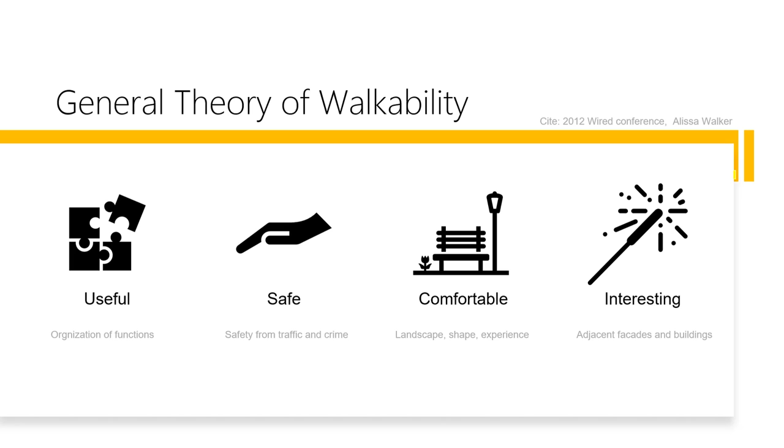In order to explain the research methodology, we would like to give you some background information about our research context and case study. The city of Pécs, once the cultural capital of Europe in 2010, experienced a wide range of improvements, which enhanced the pedestrian experience in harmony with the rich history of Pécs. Kórháztér was part of these enhancements. It included the development of pedestrian sidewalks and pathways, historical vegetation protection, etc.

Kórháztér intersection was chosen as the area of field work for the following reasons. First, it is one of the busiest public transportation junctions in the city, where more than 13 bus lines are interlocking at the bus stop of Kórháztér.

Second, Kórháztér is connecting four streets: Rákóczi Street, which is a ring road enclosing the historical downtown, Hungaria Street, leading to the West Subcenter, Alkotmány to some faculties and residential zones, and Ferencesek, which has rich pedestrian, historical, and commercial value. From Kórháztér, it is possible to reach any faculty by bus or retail clusters within the city, and the city center with most restaurants, cafes, and bars.

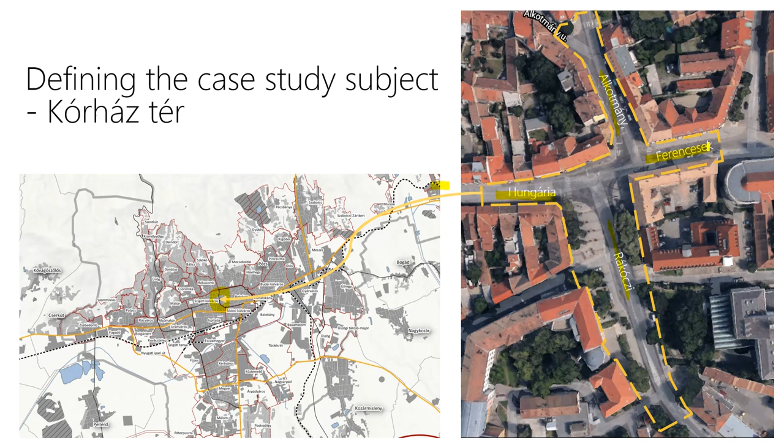The research studies both the junction and the division of the connected streets to assure that analysis and results can be accurate and carried in a continuous method. Based on the chosen field case study, we developed our research methodology. The research consists of field investigation and improvement study. The field investigation aims to measure the impact of existing greenery on pedestrian walkability.

Therefore, we use both qualitative definition and quantitative measures to firstly assess greenery area in accordance with the pedestrian experience in both vertical and horizontal dimensions. The vertical assessment is based on street elevations perceived at the human eye level, and the horizontal assessment is based on floor plan perspective.

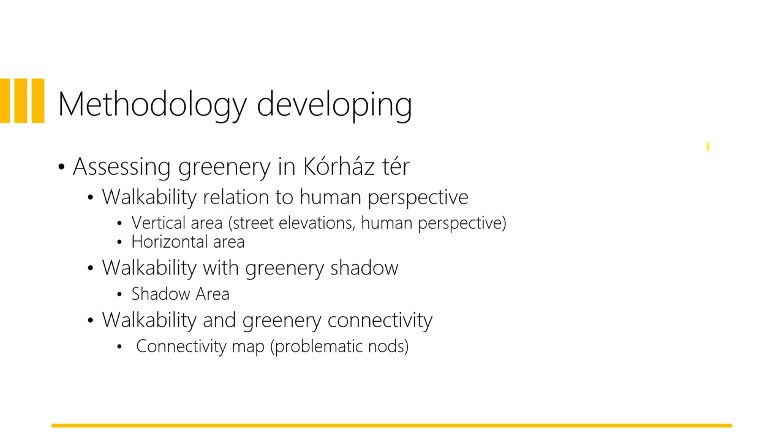Subsequently, it aims to assess the sidewalk connectivity at Kórháztér intersection, taking into account the position and size of greenery. With the result of investigation, improvement study comes along to identify the potential of walkability in terms of greenery enhancement. In order to assess greenery horizontally, the method applied deliberately focuses on spatial impact in relation to humans.

Existing vegetation was classified according to its visual impact from an eye-level perspective into the following 5 categories according to volume and height, which are trees, bushes, pots, wall cover greenery, and ground cover greenery. While walking through the area and photo documentation, it was found that acer, ash, and platanus are the most dominant species found in Kórháztér. In addition, 2 aged pine trees exist in the middle of a sidewalk as part of heritage protection. After identifying each type of vegetation, the green space coverage is extracted from aerial photographs.

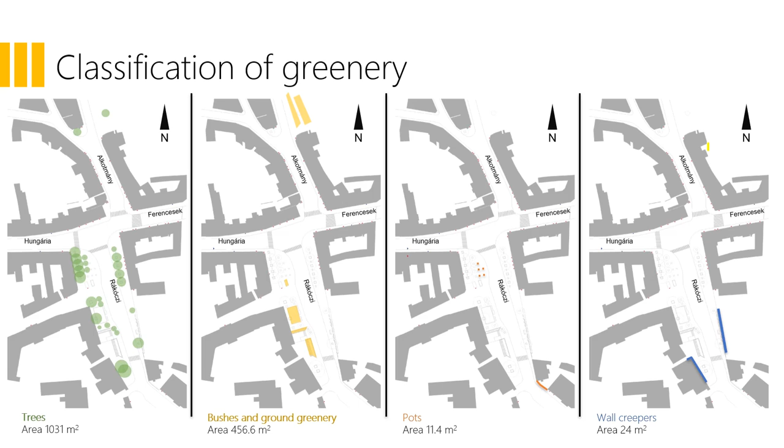We mapped the greenery by plotting their position and type. From the maps, each type of greenery was quantified, and the area was calculated from a floor plan perspective. Trees were located in different locations of the sidewalk, covering an area of more than 1,000 square meters of the sidewalk. Bushes and ground cover greenery cover over 400 square meters and are mostly located behind the stationary waiting zone, while pots and wall cover greenery cover approximately an area of 36 square meters from the top view.

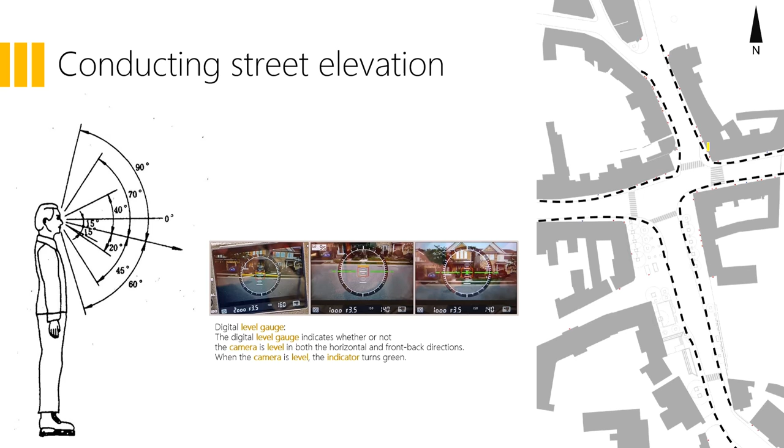The other assessment was based on the vertical measurement of greenery. The street elevations at human eye level are documented with photographs. To record the right vision of the human eye and meantime the elevation view, a digital level gauge was applied. The process of leveling is demonstrated in the photo in the middle. We used a Sony RX100 third generation camera to take a series of photos along a path aligned along the building facades. With this method, we define the perception of pedestrians at Kórház tér in terms of an elevation approach.

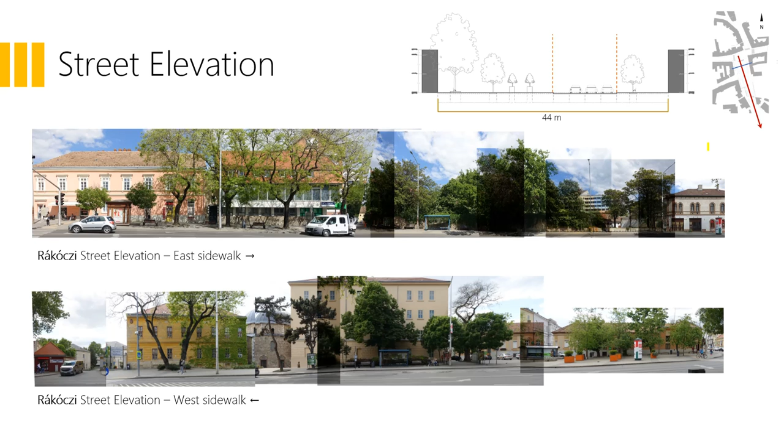Then we merge the photos in Adobe Photoshop with the help of the stack script, tweaking it manually when it's not applicable. Here we can see 2 elevations on Rákóczi Street with the section at the widest part. Here you can see a segment of Alkotmány Street elevation, which is to the north of Kórház tér. We can see that there is a sudden decrease of green coverage compared to Rákóczi Street. From the section, we can also notice that there is no buffer zone between car lanes and pedestrian sidewalk due to the narrow street section compared to Rákóczi Street, where it was 44 meters and here it decreased to less than half.

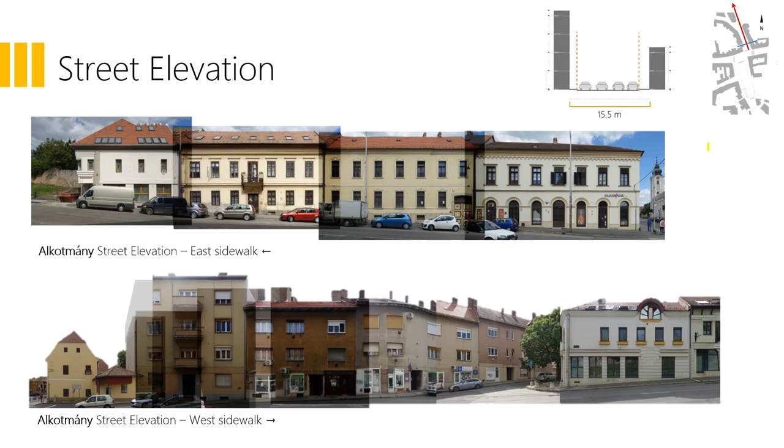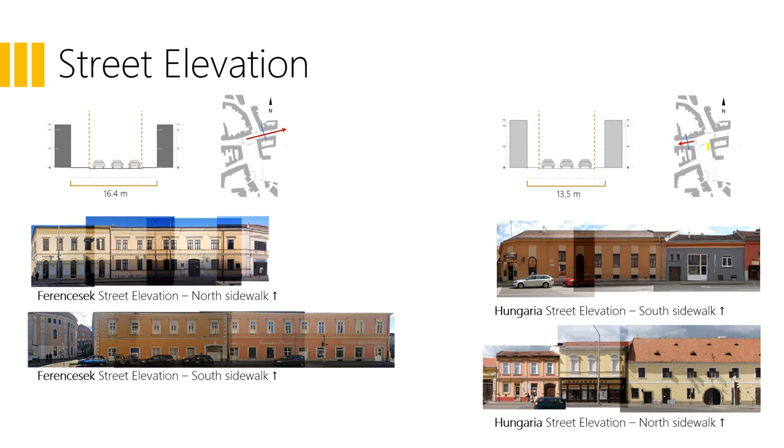And finally, we can see the elevations of Ferencesek Street, where the car lane ends and connects with the exclusive pedestrian pathway which directly links from Kórház tér to the city center of Pécs. Also on the right, the Hungaria Street elevations, which lead to the subcenter in the west. After creating the street elevations, each elevation was analyzed separately. All street elevation greenery types are traced in Adobe Photoshop by pen. This includes bushes, pots, and vertical greenery including trees and wallcreepers. And then the area of greenery was calculated with the Photoshop Analysis tool in Photoshop units.

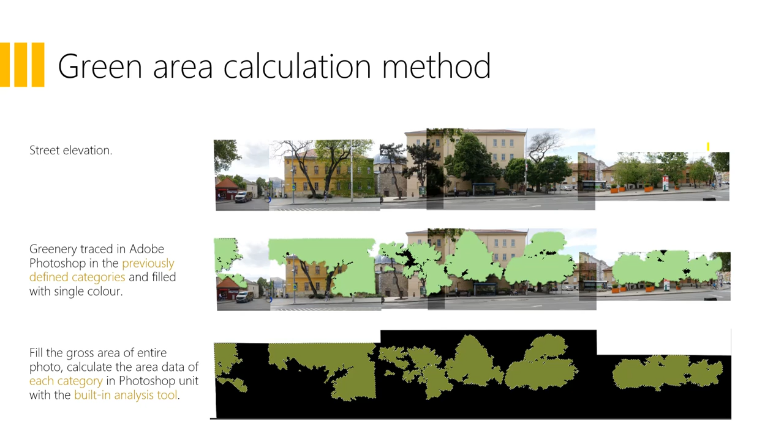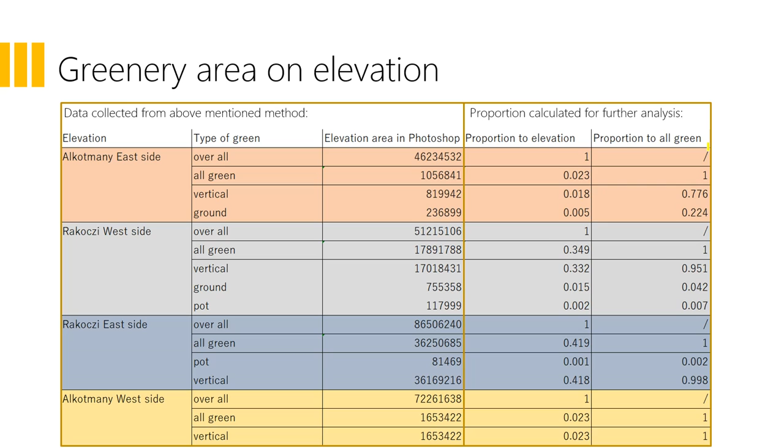Here we can see west and east elevations of Rákóczi Street and the east and west elevations of Alkotmany Street. It is quite notable that the greenery proportion was very different in these two street elevations, while on Ferencesek Street and Hungary Street, there was no greenery in these elevations. With the data of each type of greenery and their respective background, it is possible to achieve the proportion of each type of greenery out of the sum greenery and out of the whole vision of eye level. Let's see the charts made from these data.

This is more clear here that on Alkotmany Street, the elevations have equal coverage of greenery, which is 2.3%. On Rákóczi Street, the elevation on the east side is 41% covered by vegetation, while on the opposite side a bit less. Also from the chart on the right, we could learn that compared to the side view of bushes and pots, trees are the absolute dominant feature in human perception in all four situations.

After the analysis of actual green surfaces, human behavior is another essential feature to take into account when doing the improvement proposal. This part of data collection is based on photo documentation and on-site exploration. In this map, you can find red dots representing moving pedestrians and red dots with a line representing moving bikes. Meantime, yellow ones represent a waiting situation, and finally blue ones represent a long-term staying situation. Red lines of walk routes were traced according to the red dots.

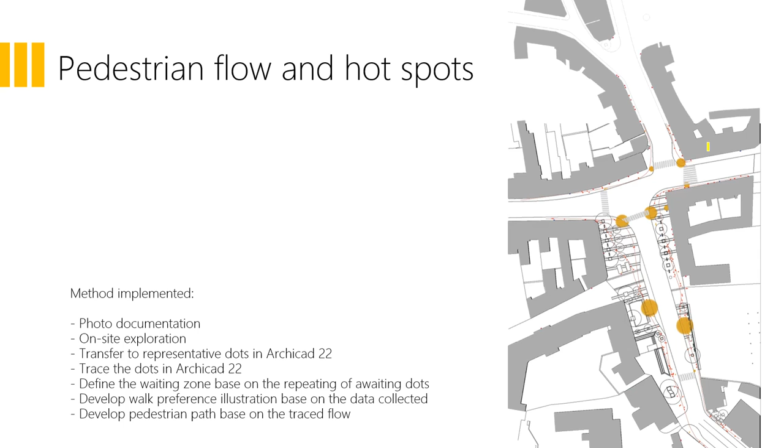Enhancement based on these lines may be able to maximize the use efficiency of each sidewalk. And bigger yellow circles tell the awaiting groups of people. These data reflect the demand and habits of local pedestrians. Our improvement proposal needs to follow these habits as much as possible if they don't mean harm to the local environment.

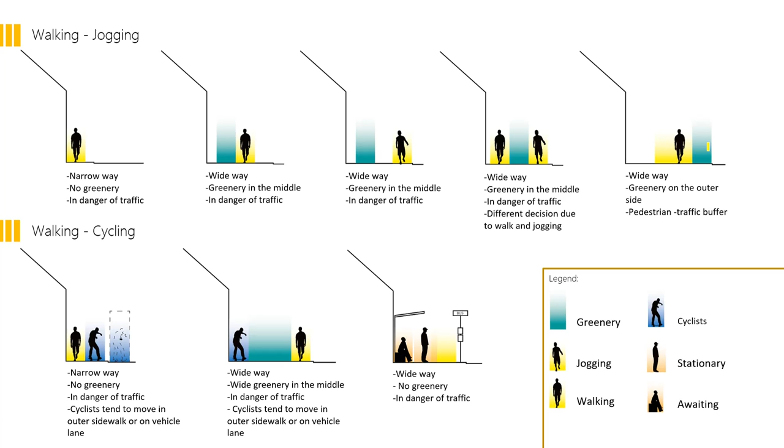Here we sort the phenomenon regarding all types of pedestrian in case of the studied zone. The top view tells about how pedestrians behave in cooperation with sidewalk with adjacent greenery and other pedestrians. And the bottom figures show how pedestrians cooperate with cyclists in different situations and with awaiting people. We could learn that the position of greenery and whether there is greenery or not matters very much to how local

pedestrians behave. Based on the trace of pedestrian flow, the path map was produced, taking into account the buildings and trees. Yellow color marks the segments that are without shadow protection from the sun. So here we have a new criteria about where and what type of greenery can be enhanced. In the middle, we take into account the functions on the facades with their entrances, as well as the vehicle junctions and view direction from bus waiting area that should be clear.

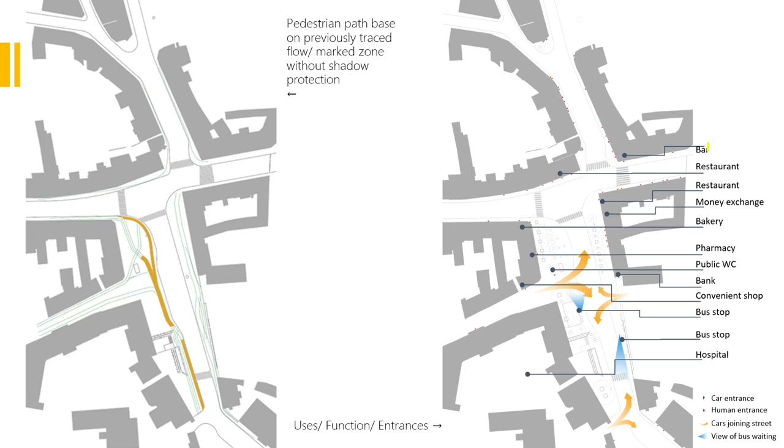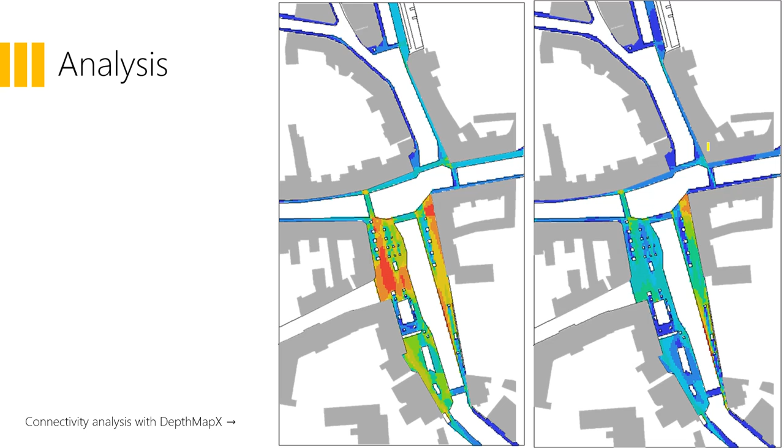Buffer zone between car lanes and pedestrian way is needed in many places. Bushes can be a better solution considering visual safety. Same visual safety is also needed in the zone with existing grids of trees. Vegetation below eye level can cooperate with a few street furniture to enhance the interaction between pedestrian and built environment, and meantime increase the safeness.

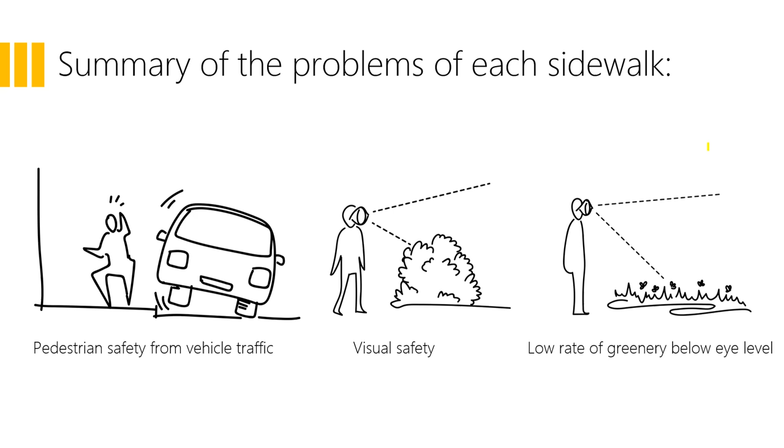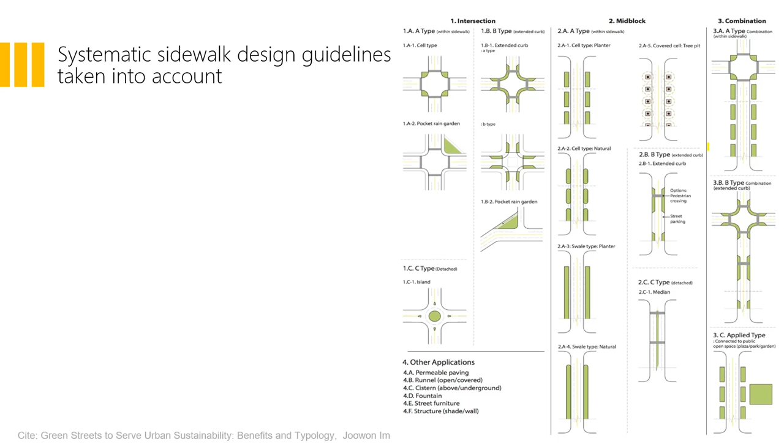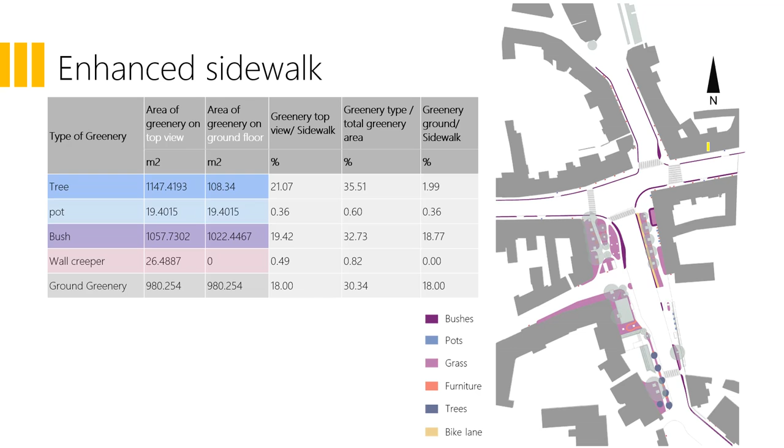A narrow buffer zone created by bushes is placed to the edges where there's no contradiction with vehicles. Few greenery in pot format is proposed where continuous greenery is not applicable, and a few trees are proposed in the south part to provide shading and more friendly interaction. A bike lane is added to distribute the load of the pedestrian on the east side of Rákóczi Street, and meantime enhance the safety of pedestrians.

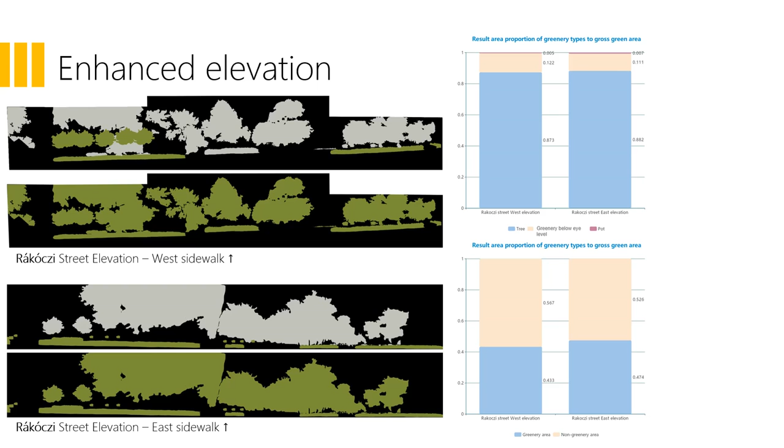From the vertical point of view, these images and charts summarize the modifications and results on both elevations of Rákóczi Street, where the most complex situation takes place. Judging from the charts produced from similar steps when we did the analysis of the existing elevation greenery, the proportion of greenery below eye level increases, and the overall proportion of greenery gets a slight increase from the elevation point of view. Here is a quick recap of the main conclusions.

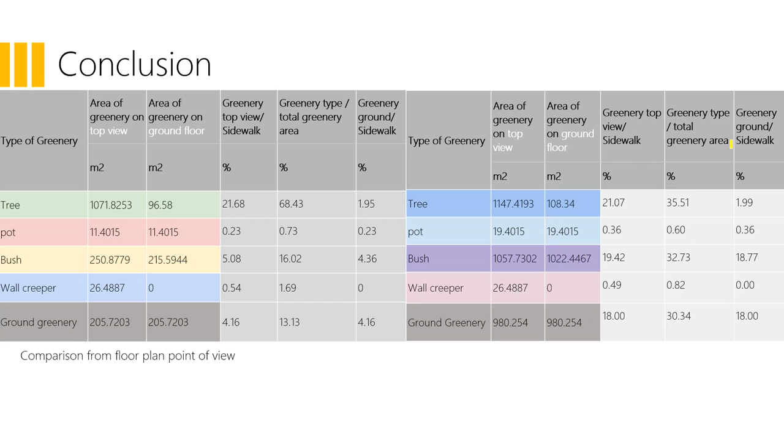The comparison of two tables expresses that the greenery on human eye level was increased almost 4 times than the existing, in which pots increased by 70% and trees by 12% of existing greenery. Area of greenery on the ground is enhanced to reach 39% of total sidewalk area, while the existing percentage was 10%. We improved the diversity of greenery, especially on the east elevation of Rákóczi Street, and meantime, it is where the most significant enhancement took place.

From this, we can conclude that regarding greenery design, 30% of sidewalk was not in efficient use and could play a great role in enhancing local walkability without affecting the inherent pedestrian behavior. Here is what we can conclude through the study. The applied methodology can be generalized to further studies to assess street greenery of similar kind.

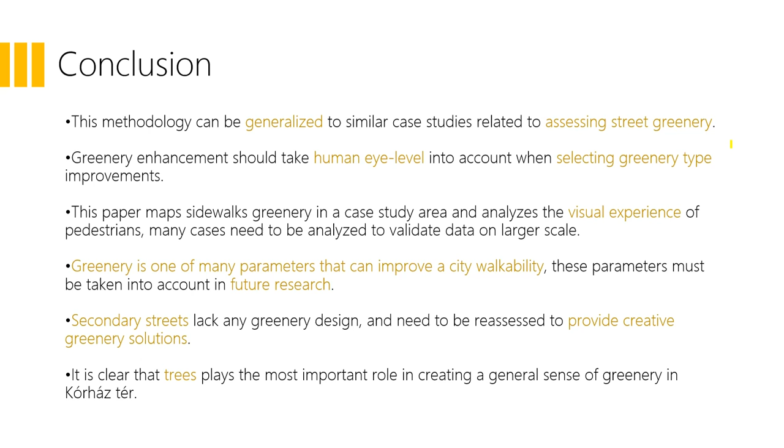Human eye level is one of the keys to produce analysis and result in a more human-philic way. Secondary streets of the subject city lack greenery design, while the limited sidewalk space requires more creative solutions. In the series study of walkability, we will continue with other aspects in walkability enhancement.